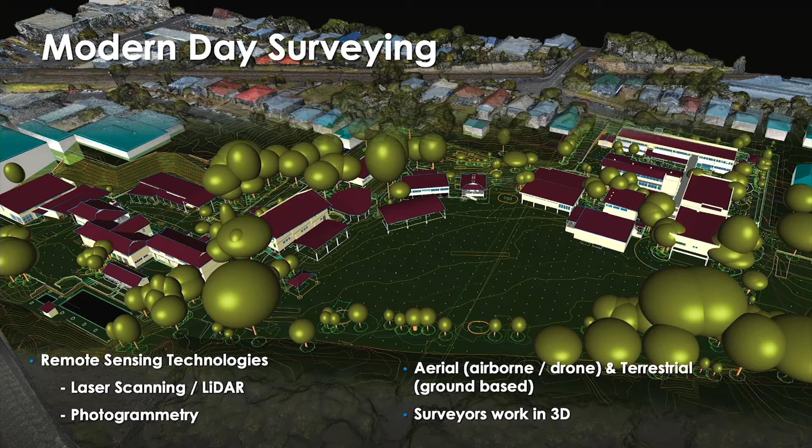And one point that I wanted to make is really all surveyors work in 3D. As a standard, our files are 3D. And we do get a lot of clients ask for 2D, thinking that they might... It's actually not any easier. It's flattening our data and sending it out.

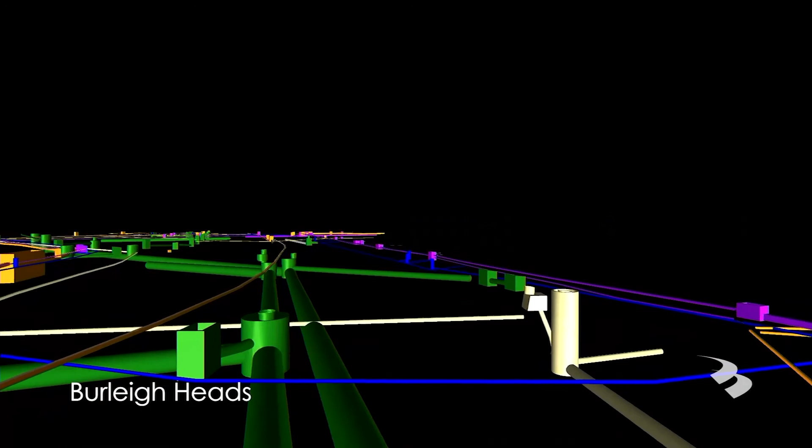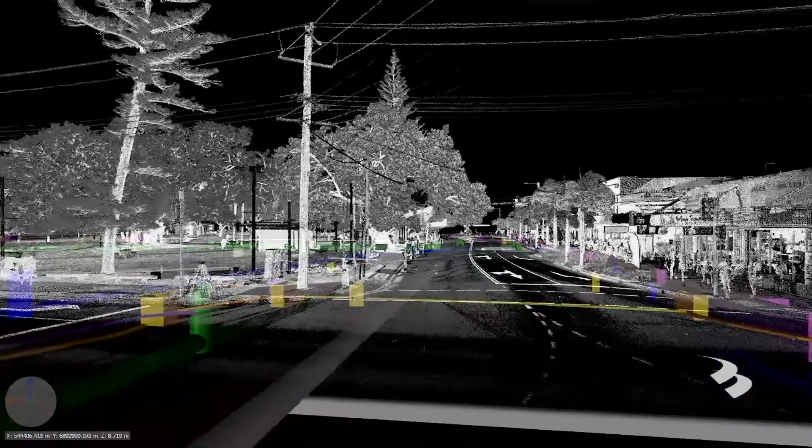So surveying applications: laser scanning, detail surveys. Essentially, we might laser scan areas because they're difficult to access, complex environments to model, things that really would require a hell of a lot of field time. So essentially, we're doing a lot less surveying in the field and more on this nowadays. I'll touch on some of the outputs that we can get from these types of surveys, but I'm pretty much just trying to show a few applications that we're doing in modern day surveying.

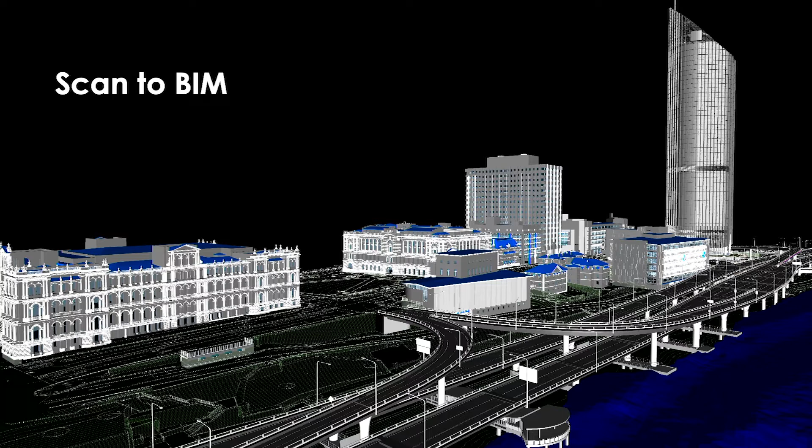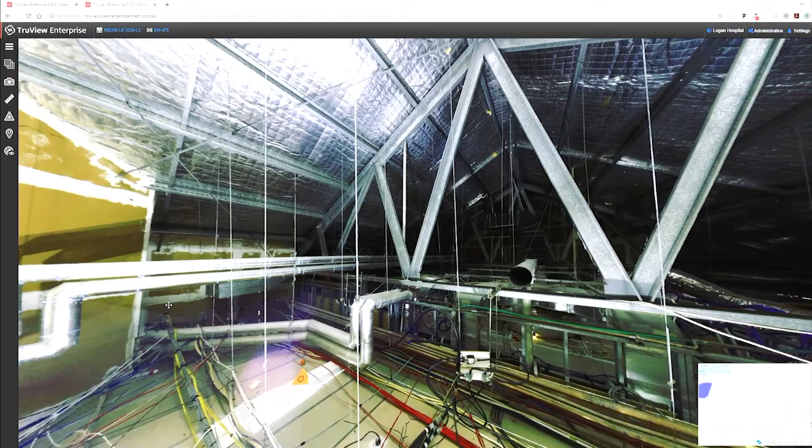Scan to BIM, many would have heard of this nowadays. It's essentially laser scanning and subsequent 3D modeling. And yes, we're Revit users, as pretty much any surveyor. I'm probably the only one here, and I'm going to be very unpopular showing Revit there. I'm just showing one of the applications we're doing is embedding things like TruView panoramic imagery inside of these files. We have this week found a workflow to get it into IFC files for Archicad. Made this video beforehand. But these are the type of deliverables that you can really maximize nowadays.

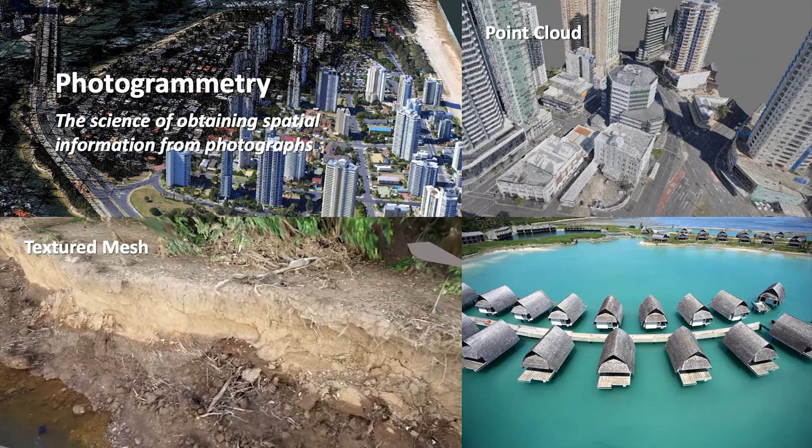So that was laser scanning. Photogrammetry can be done by your iPhone, just take a lot of photos, stitch them together, create a 3D model, or you can use high-end digital mapping cameras and things like that. It has really taken a huge step over the recent years with drones, and almost all surveyors have a drone in their toolkit to do these types of surveys as well.

So different survey information needs, things to consider when asking for a survey. We will go through a brief at the end. Cadastral boundaries are always important. If you're building close to the boundary, the secondary interests, or you're doing a lot reconfiguration, cadastral surveys are required. Sometimes they're not. You can just get away with a standard detail or contour survey. Did want to talk a little bit about the difference. A detail survey is essentially getting all of the detail surface features on site. A contour survey might just be topography, so if you are demolishing everything, you might not actually need everything done.

Measured building surveys, that's obviously the internal measurements, which nowadays we do mostly with scan to BIM. Underground service requirements. There are actually subsurface utility standards associated with that we survey to. So obviously we can go to mapping every single service underground in 3D to centimetre accuracy, but sometimes you just need an indication. It's not always required.

Accuracy requirements. Often we see on briefs by other consultants telling us the accuracy that we need to meet on a survey. And of course we can almost always meet these accuracies, but it's always about weighing up the cost associated with that. Do you really need 5mm accuracy on an open sports field that's going to be ripped up anyway? So it's just something to consider. And will an aerial survey be sufficient? You might be able to save a fair bit of cost on the early phase of the project by doing it by a different method.

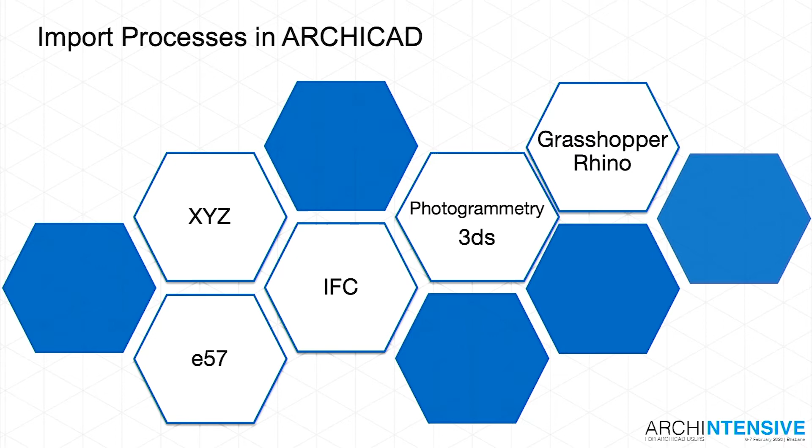So when we start with this process, you've got to think of the different ways in which you can bring information into Archicad. So we're experimenting and identifying the different methodologies that users can take to generate a site terrain. So moving away from the standard approach where users are tracing DWG drawings, you can bring in XYZ files, and I'll talk about those and the problems with those in a minute. E57 or a point cloud file format, IFC format. Photogrammetry can come into Archicad as a 3DS file, which converts into a GDL object, and then processes using Grasshopper and Rhino.

Oh, it's all right. The video hopefully will work.

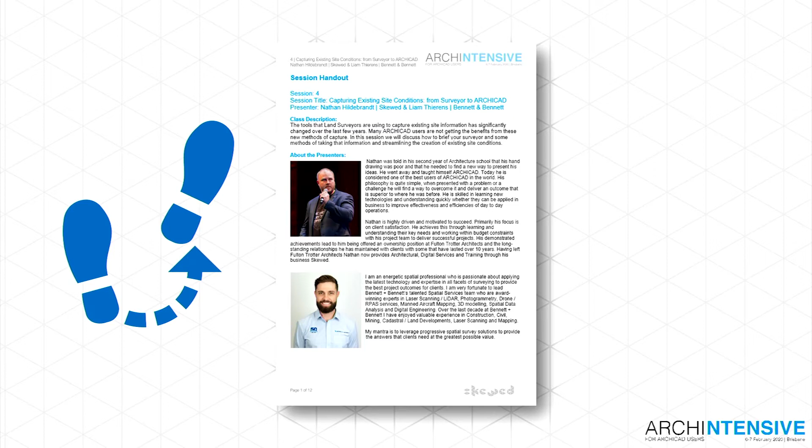So the key thing is that I'm not going to go through all the processes in 40 minutes. It's going to take a long time. So I encourage you to read the handout. There's step-by-step guides on how to import these file formats and get a terrain output, okay? So if you want to see that and the step-by-step, go into the handout and you'll be able to actually achieve it.

So what criteria? We always look at what's the outputs that we're trying to achieve. So what's the criteria that I'm wanting to achieve in a terrain? Well, first of all, how long is it going to take me to create? Because that's time and that's going to cost me money. What's the graphic output in plan? Do I end up with contours? Will contour lines be in plan? Secondly, graphic output in sections and elevations. Am I going to achieve a solid appearance rather than having a single line plane?

And the rain's coming down big time now.

The ability to actually interact with this element that's been created and modify it and change it and be able to do things to it. Attribute management. I keep banging on about attributes, but attributes also can be affected through this import process. Polygon count and the load on your software, because the last thing you want to do is load something into your file, build this terrain on a site that you're working with, and have your file perform poorly from the time you start working on it, and you're starting on a bad foot already.

But most of all, I think the most important component of all this is accuracy. Now, when a surveyor goes out on site, in the past they used to go around with a dumpy level and take points at places where they thought it was very important to achieve the level of accuracy that was being requested by the architect at the time. I think that's right, isn't it? You'd make the educated decision as a licensed surveyor to say, I need to get levels at these points. Now processes have changed, and you can do things differently with scanners and all that sort of stuff that then calculates those things. But you want to achieve the accuracy that you've actually asked for in the delivery from the surveyor.

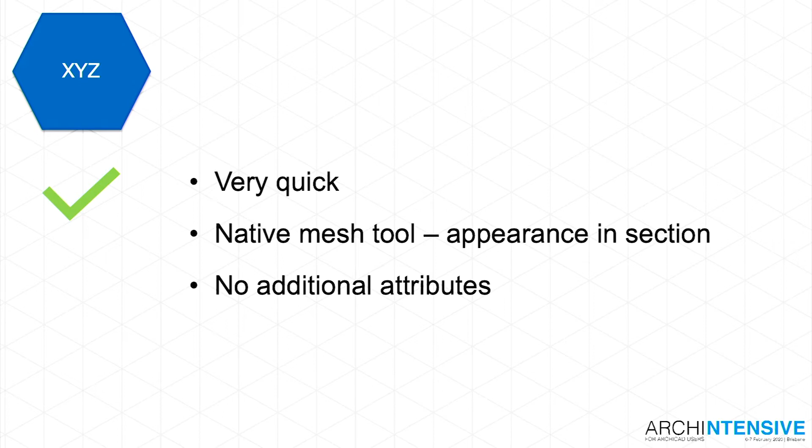So let's look at those in point. So XYZ files. Let's look at the positive of an XYZ file. It's very quick, right? And it uses the native mesh tool. So you get appearance in section, and you get no additional attributes. So it's using what's already built in Archicad. Now, the big failure in XYZ: there's no contour lines, it just generates a plain old mesh.

There's very high inaccuracy at break lines, and I tested this workflow a decade ago and told Graphisoft they should pull this whole feature out of the software because of the potential danger of this and how people will just say to a surveyor, oh, can I have an XYZ because I've got that feature in my software. It's going to work really, really well. But I'm going to show you in a live demonstration in a minute how bad it can be and how you don't want to use this at all.

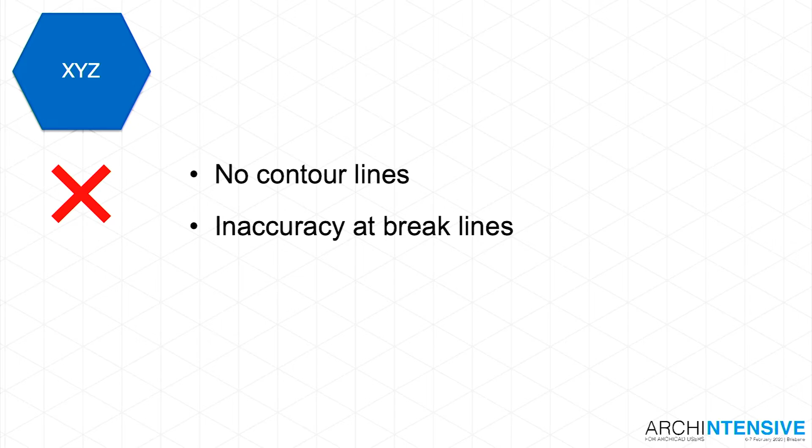So he's taken those 13 points, and when an XYZ is imported into Archicad, it just puts the points into space. It doesn't do anything more than that. It has no more smarts. It's only an XYZ in a text file. It says, I'm this height in this location. But a surveyor works in triangles.

So each point has a relationship to 2 other points as a minimum to then generate and create a true terrain. Now, people can test me all you like on this, and we talked about, okay, well, if we wanted to stick with XYZ as a methodology because we're going to use native mesh, can we just increase the density of said points to reduce the inaccuracy?

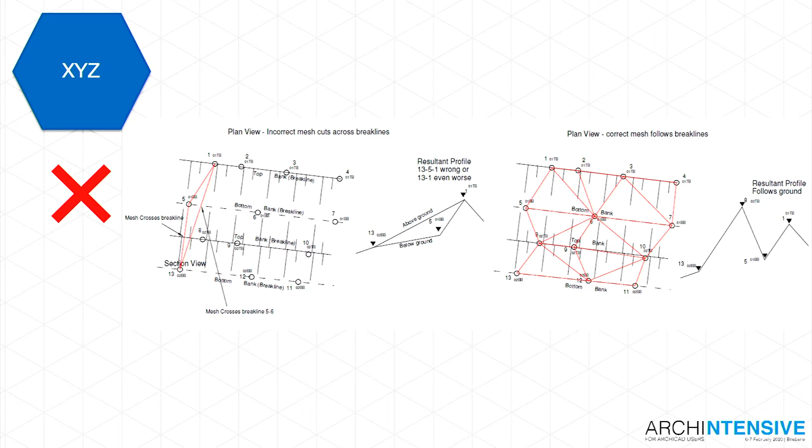Now, once again, I'll show you an output that comes directly out of a surveying piece of software where it has generated this XYZ by algorithm, because it's determined that's the right methodology to do so, in comparison to an IFC export. It's quite scary, so please do not use this methodology. So, a point cloud.

So point clouds, in my view, are really, really powerful for capturing existing conditions, because the majority of projects that I used to work on were located in remote Queensland. So if you missed a dimension, you'd have to travel for 2 to 3 hours via car to site, take the extra dimensions that you wanted, and then drive back to the office. So you've lost a whole day, potentially, of time in capturing these things.

So a surveyor, when they go out on site, can use their scanner, capture all of that information. Once again, it's a time saver for them as well, because you could at the start say, you know what, I only need this information. Now, point B, if you ask for a certain level of accuracy and the level of accuracy that you want increases, that can cause a problem with scan times. So it would have scanned at a certain speed, which takes a certain amount of time. If you said that you wanted to increase the accuracy, that could be a problem.

But what that can do is they can capture all of the information within this space. If you ask for the plan outline and the heights, but then you go, actually, I want to know exactly where that duct outlet is, they can go back into their data and pull that information out for you. So it's really powerful for that. As I said, it's a high level accuracy. Depending upon the material that you're hitting, the accuracy changes. So gloss, no gloss, and reflectivity and stuff like that.

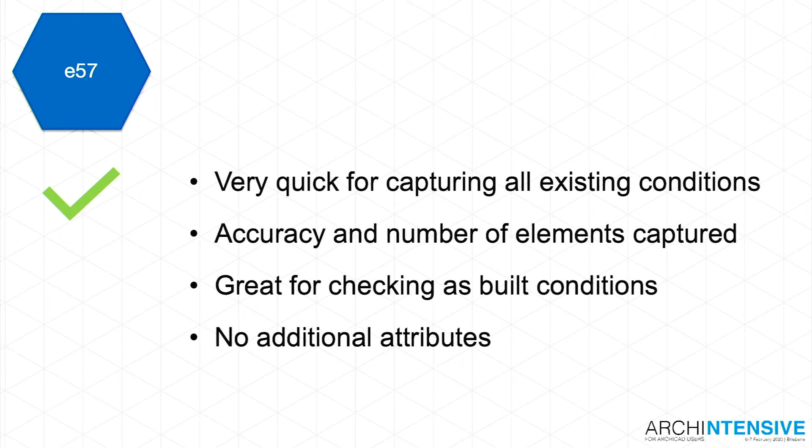And it's actually a really good process for checking as-built conditions. So as I talked about this morning, moving forward, clients are going to want more information, more accurate information about what's been built. This is possibly a process that may be utilised at the end of construction. The other positive is there's no additional attributes. Yeah, I love attributes. I should get a t-shirt on that, but anyway. But the negative is that you still need to model or trace the elements.

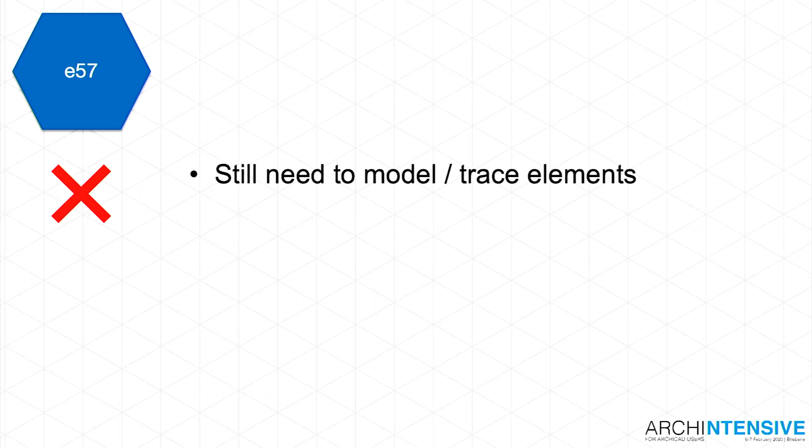Okay, so this, as a point cloud, I'll just make sure I got it. No, it's all good. So when you put a point cloud into Archicad, when you're working natively within Archicad, you can see the points in plan, in section, in elevation, and in 3D. When you publish a PDF, or when you save a view onto a layout sheet, none of that information actually carries through. So you actually have to model it. Now, there's no way in the world I'd try and model a terrain from a point cloud. Some people might be crazy, but it's not going to save you time.

The problem with point clouds, because of the number of points that it's picking up and the accuracy, the files can be extremely large. And for people that are not experienced with point clouds, when you open up a point cloud into an Archicad file the first time, it can be very overwhelming, because the level of accuracy there is what can scare you. Because you see this wall and you go, well, that wall was designed with a constant radius of a certain value.

And then when you go to model it, you'll see that there's actually inconsistencies in the depth of the plaster, because they've skim coated it to get a nice smooth finish. And the radius actually changes throughout. So you've got to get over the mindset of the accuracy that you're going to apply to it, and what's the relevance of the accuracy that you need to apply to it to actually get a built outcome.

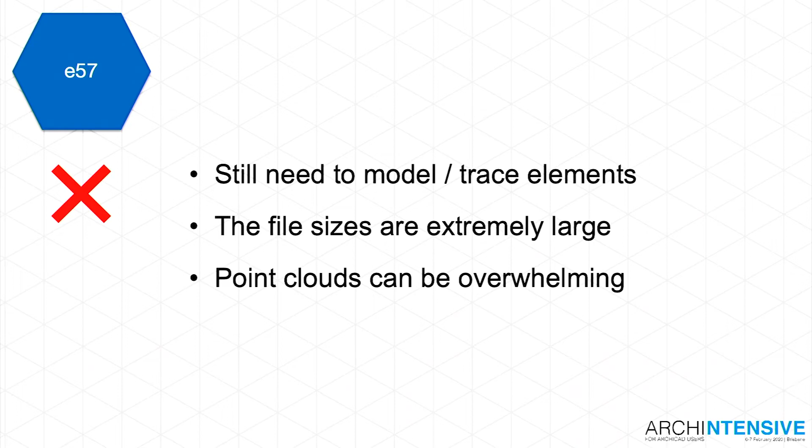IFC. So 12D is the software package that a lot of surveyors use here in Queensland. I don't know what the take-up is in the southern states. Is it pretty high still?

You're off, because I don't want any feedback.

It's still high. There we go. Yeah, it's definitely, even not just by surveyors, it's the most common civil package in the country for civil engineers as well. So their software can export an IFC TIN, which is a triangulation file that they're working with, which is the format that surveyors and civil engineers work with. That's the level of accuracy that both of those work with.

Now, the workflows: if you develop a workflow using IFC, you can not only capture the information from the surveyor, but you can also take the information from the civil engineer and their bulk earthwork levels and bring that into your file as well. So it's kind of a double banger winner.

Existing buildings in IFC format is most useful, but what you're going to find is that you'll have to have engaged your surveyor or another party to have converted the point cloud into an IFC file, but I'll also show you another software tomorrow that can automate that process or part of that process.

The other positive about IFC is the format actually holds information where all the other formats don't. Well, actually, I lie. Sorry, a point contains RGB information on top of its actual location, but IFC can hold information applied to it by a supplier, where they can actually add information explaining what that actual element is.

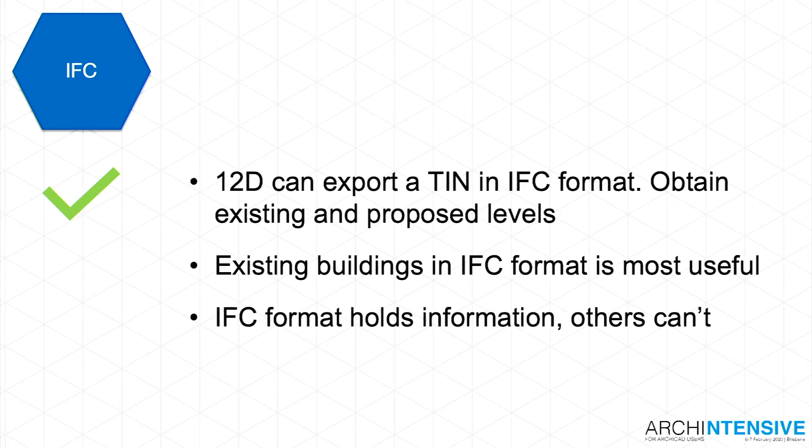So the failures of IFC: attributes can pollute your project file. So when you use IFC translators, make sure that you have a translator set up to map the information coming in so that you don't end up with stray attributes. Okay, that's the first thing.

IFC, and this is kind of across the board, IFC as a schema doesn't contain symbolic floor plan information, so it's not going to present itself graphically potentially how you want it to. And at this point in time, you can only get a plane, not a solid.

Now, there were some tests that we were able to do on Monday where we were able to get a consistent depth that followed the profile of the site, but not taking the site from its terrain level down to zero. So that's an area where it's a bit of a problem. In an ideal scenario, you could get that file with the plane all the way to the ground as an IFC solid, straight into Archicad, no other problems, no other tests. But you don't get contours, once again. So you're trying to cover all your bases.

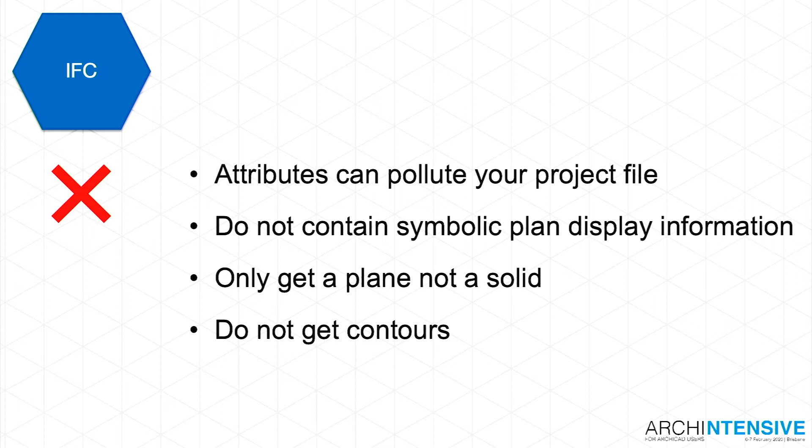Photogrammetry in 3DS, now this is exciting. I nearly killed the computer using this. It's useful for master planning and concept planning. So as Liam mentioned, they can send a plane up.

Well, you can actually pull data from the national GIS information. So they don't even have to send a plane up to capture existing terrain and buildings that surround your site. So in a master planning stage, you can ask your surveyor, can you give me this information in a 3DS format so I can import it into Archicad. So it's actually quite useful for the early phases.

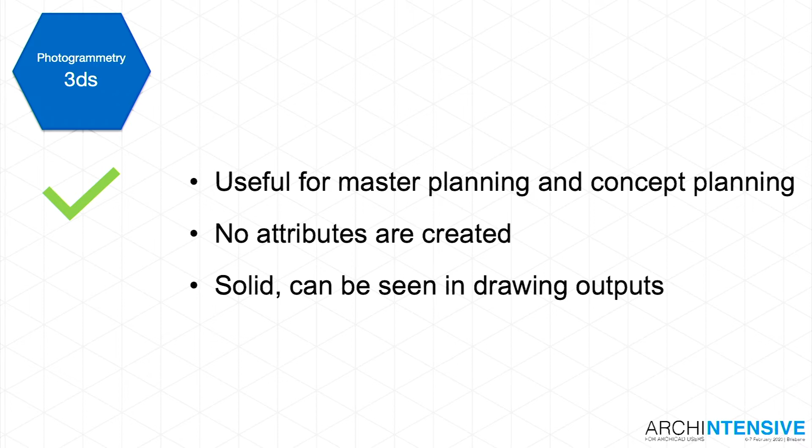No attributes get created in this process because you're bringing in a 3DS and converting it into an object. And it is solid and it can be seen in drawing outputs. So that's a big positive for it. Now the negative behind 3DS is the number of polygons it creates, and that can be a problem for a lot of users.

The textures: this format can hold textures, but sometimes it can actually lose its texture. And this has a benefit of being able to hold textures where IFC doesn't. So that's something to be mindful of. When it's converted into an object, its selection is based on a bounding box. So you get points in the corner, and you can select it with the magnet turned on, but you can't actually select the faces of the object, unlike with the other methodologies.

So let's put them all up on the board. Speed of creation: you can see here that I voted against the point cloud a little bit because you're going to have to do some work to it to get it to be meaningful for you. In terms of contours and plan, none of these actually deliver it. So the best methodology still is to bring in a DWG and place it in your file. Solid in section, we've got a mixed bag.

So we have our XYZ and our 3DS. Ability to interact with: I guess the XYZ file actually is probably the easiest one to interact with. You could argue that the IFC, when it's converted into a morph, actually has a similar capability. Attribute management: your point cloud and your XYZ don't cause you any grief. Your IFC won't cause you any grief if you set it up properly. And I think I gave that the wrong mark, but we'll move on.

All right, so 10 years of pain. I kind of want to take a pill that makes all these pains go away and solve all my surveying and existing site terrain problems. I started on the journey because 10 years ago I was given a file from this surveyor and I thought to myself, I want to try and come up with a solution that embraces this XYZ approach because it doesn't cause any issues with attributes. It's the most native way I want to work, right? But the problem is that in that XYZ format, you lose the accuracy.

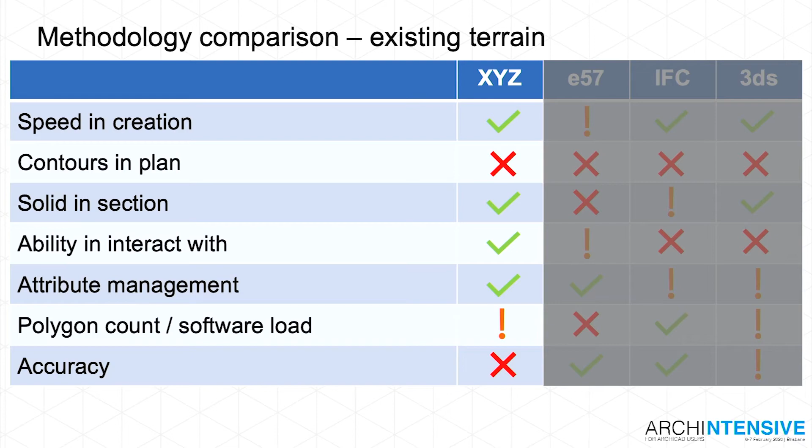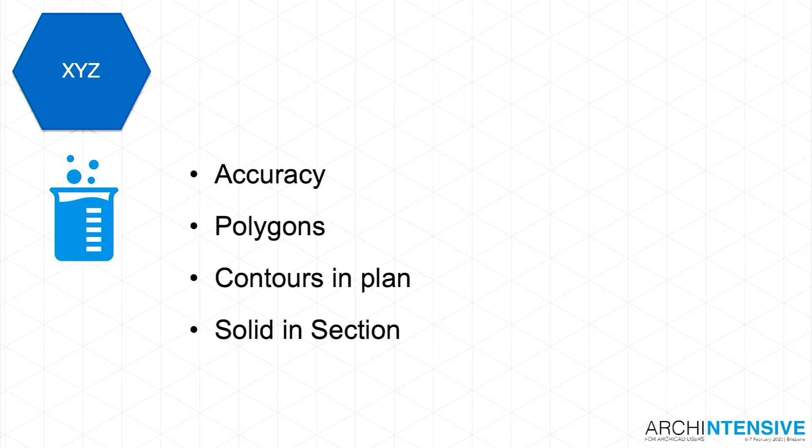So we move on to, let's experiment. And that's what the fun and joy of all of this is. It's taking lessons learned and seeing how you can do things better. So we're going to mix up a few processes. Let's look at this XYZ, right? So the accuracy is the issue. The polygons is contours in plan, solid in section. So they're the type of things that I want to achieve in this exercise.

Now, we started this experiment using this process, but the process was a 9-column text file. And what I mean by a 9-column text file was to align with the triangle file. So what we're doing is capturing each of the individual points and saying what its relationships were to 2 other points and essentially recreating a triangle file. Now, the surveyor must have gone to a lot of effort to try and create this, because all the discussions with Liam are like, we can't get this out. It can't actually be achieved.

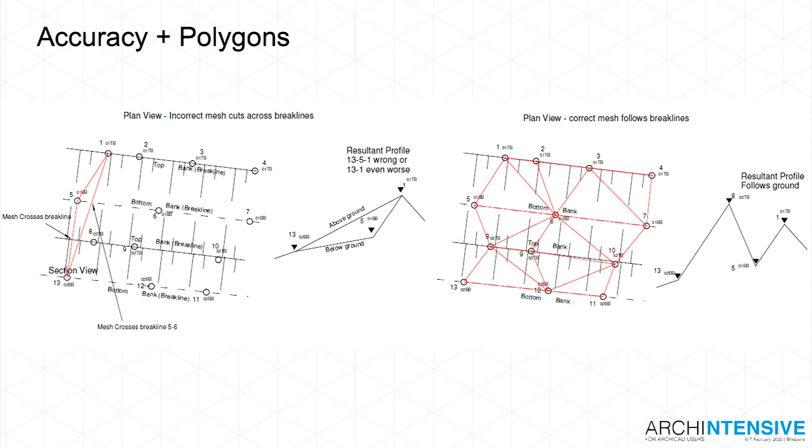Now, Jon Mirtschin from Geometry Gym, about 12 months ago I think, we came up with an experiment where we pushed that 9-column file. He took it, put it into Grasshopper and generated the nice terrain for us and demonstrated that it worked. So I've gone, all we need from our surveyor is, Liam, just give us this, and my problems are solved. But alas, we've got no chance. So triangle file, fail.

So the route that we've gone down now is IFC. The reason for that is the accuracy side of things. And I better just check because I don't want to overstep the mark. But working with Jon Mirtschin, we've worked through methodologies, and he's the brains in terms of putting Grasshopper scripts together because I couldn't do that to save my life. But we're trying to achieve accuracy and polygons here. Now, it means that we have to rely on morphs, because to achieve this complex geometry, the only way we can get it out of Grasshopper is as a morph.

And you know, we could take the approach. So I look at the way in which we could have achieved this whole scenario. So as I talked about previously, if we get this IFC, we get a plane. Now that plane, you could import the IFC into Archicad. You could then model your terrain as a solid slab or something solid. Then use that IFC, which is converted into a morph, to become a solid element operation with an upward extrusion, therefore generating your solid terrain.

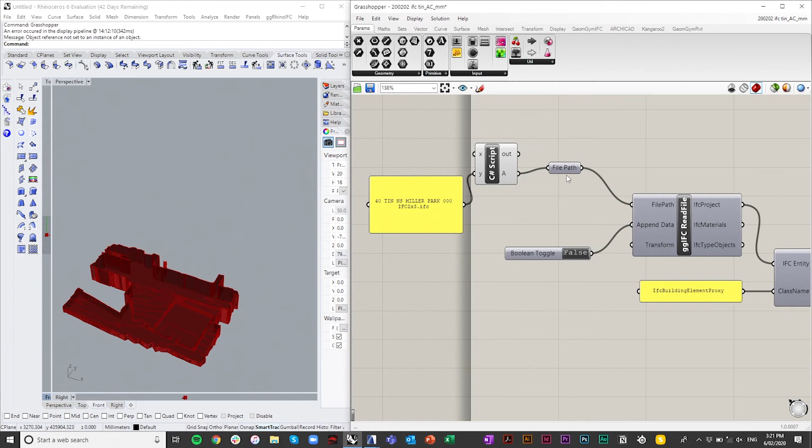You take the time. So I'm not going to go into detail about the script specifically, but at the end of the day, what we have here is an input of an IFC at the start that's been created in 12D and exported. So this is a replicable example. We come down to the end, and right now it's not connected to Archicad. So at the bottom end here, I've got a morph, which is a morph solid, which generates my terrain in 3D. And at the top here, I've got my morph curves, which essentially set out all of my contours.

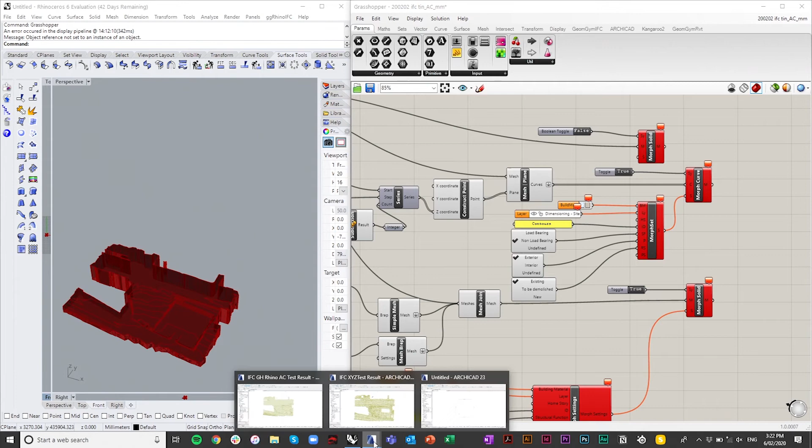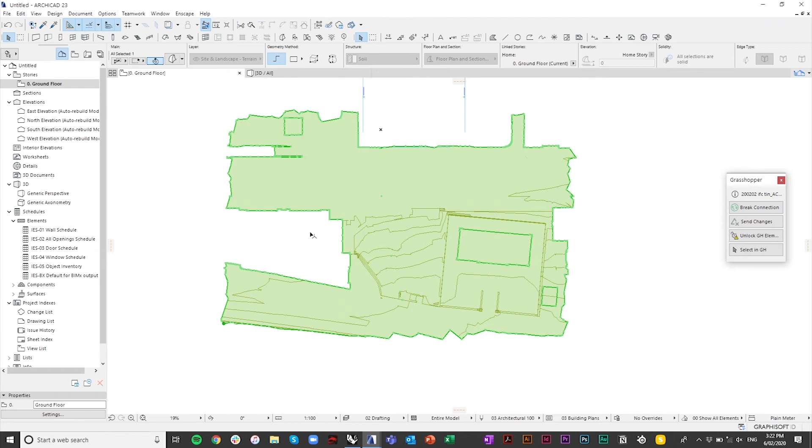Now, I'm going to open a blank file, and we're going to connect this to Grasshopper. Now, I've cheated a little bit because of the story settings. So this is an out-of-the-box international version of Archicad 23. So what we have now is our mesh, which is a morph, and we've got our morph contour lines. So in 3D, we'll explode out. That's how it is.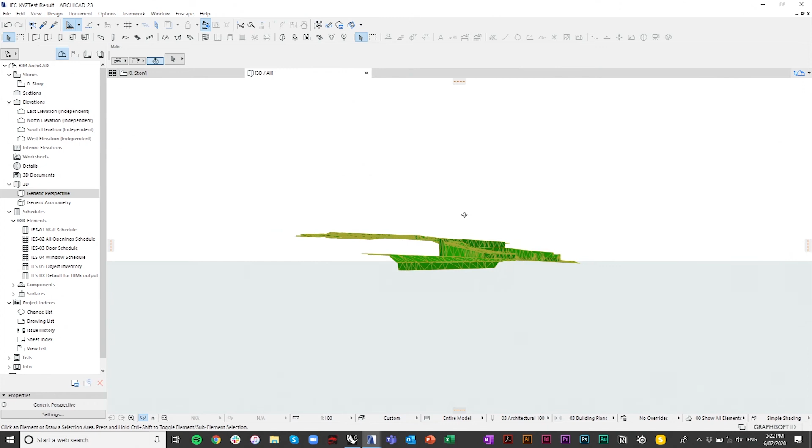Now, just to give you a bit of context, this is what an IFC looks like when we bring it straight into Archicad from the IFC file that was created. Now you see here there are some holes in here. So John cheated a little bit and wrote some script to cover in some holes that appeared in the middle. Now you can talk to your surveyor about whether or not he is willing to put a plane in where existing buildings are, because obviously not providing information in those holes means that he's saying that he hasn't measured it, so you could take that approach.

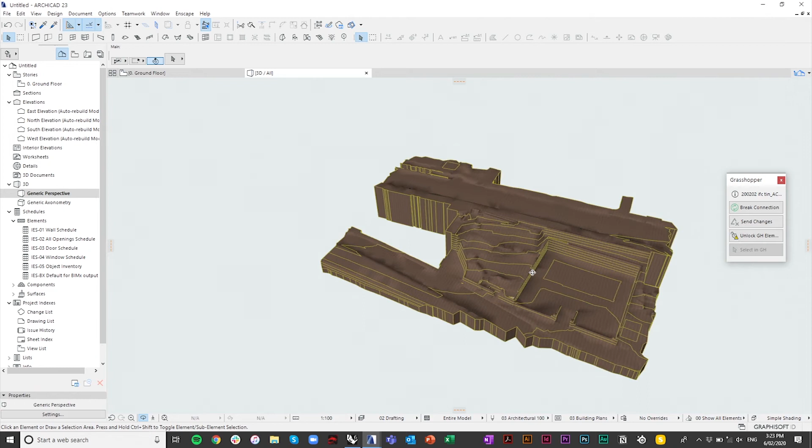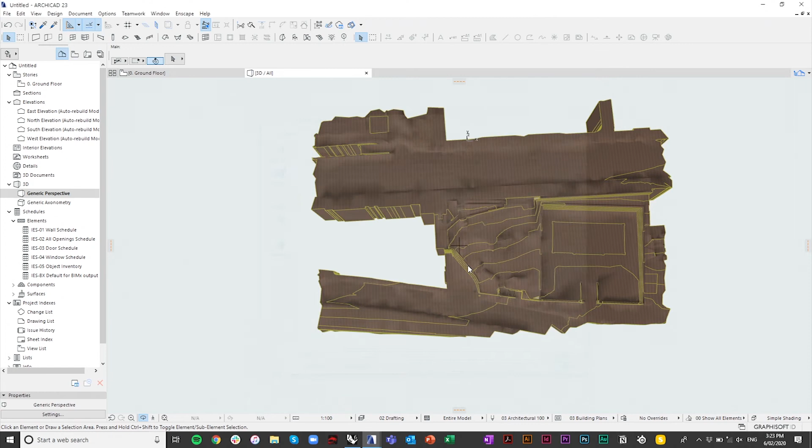But what you can see here is an output straight from Grasshopper. Now, let's see if it's going to behave itself. And I want to now do the XYZ methodology. So just remember, when you're looking at this, actually I shouldn't do this in 3D, I should do it in 2D just so it's a bit neater. But I want you to observe where the boundary of this IFC mesh is that's been placed as a morph. So I want you to observe where the edges are. That's the first thing I want you to see.

So let's go to interoperability. We're going to place a mesh. This is an XYZ, pure XYZ file.

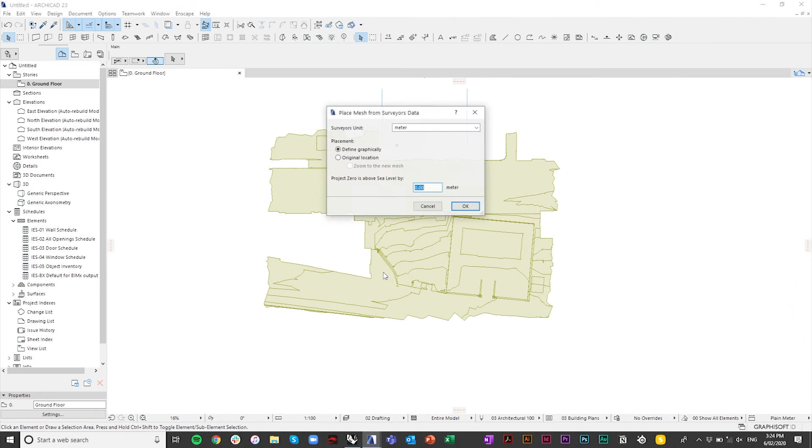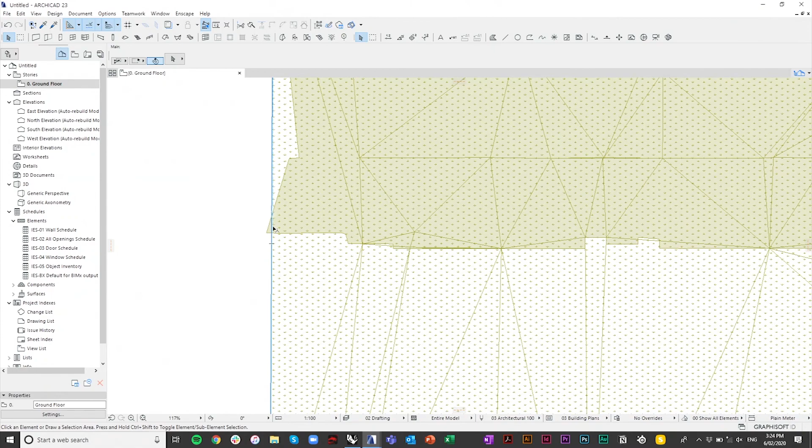Because we've received it from a surveyor, we're in meters, because they like it, and we're going to put it in its original location. All right. What's the problem, first of all? So based upon the XYZ coordinates that are part of that file, Archicad said, well, I've got points in certain locations, so I'm going to fill the gaps. All right, so it's missing bits.

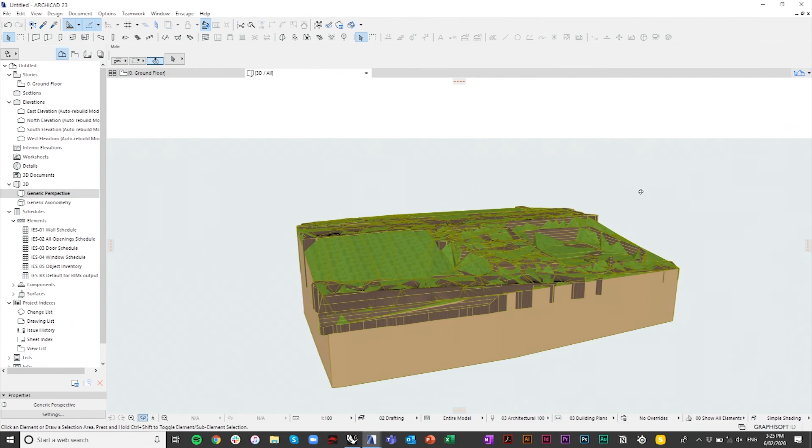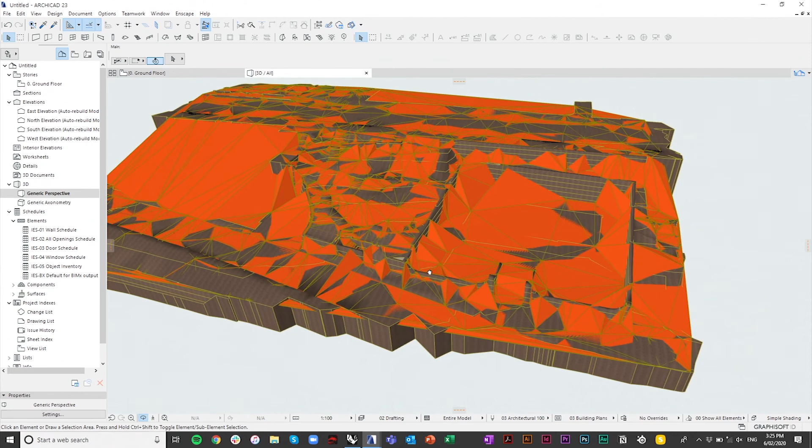But this is the more entertaining part, and this is the reason why you never use XYZ. Yep, that's all right, we're going to do that later. So what we want to do, and normally I put this over the other IFC file. Now, the XYZ, because I don't like it, I really detest it, let's make it red, and let's make it a plane. Now, because of its approximations and its estimations, look at the difference between the accurate IFC and the XYZ.

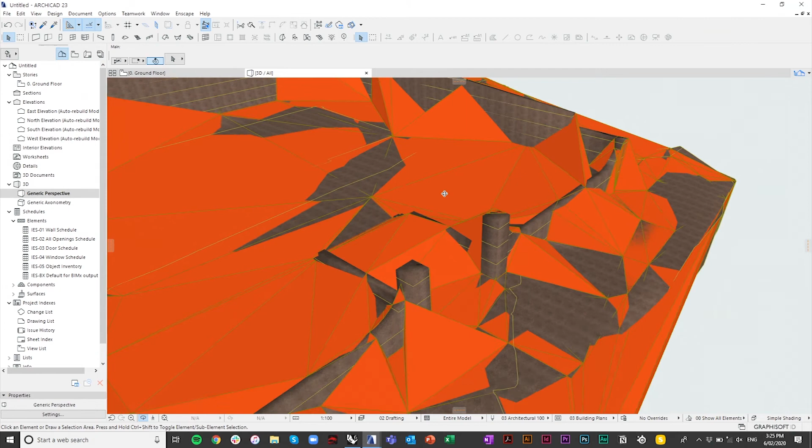Now, when I first did this, it was the pillars to the commissariat store, just down the road, across the river, accurately provided by a surveyor and essentially decimated by an XYZ process, okay? So it's something that I basically think should be thrown in the bin.

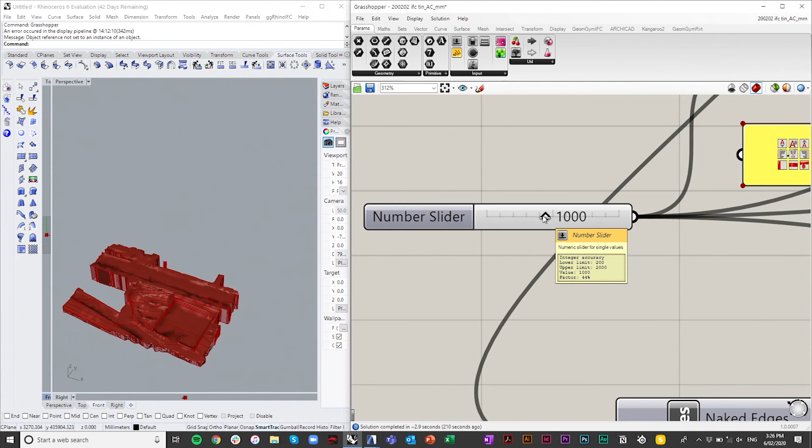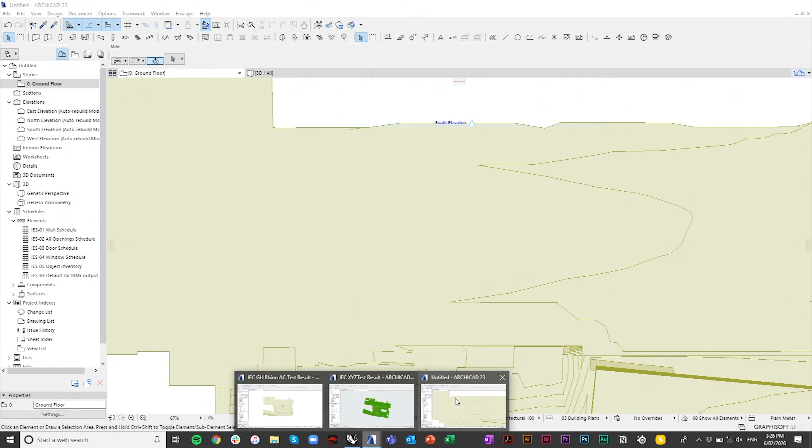Now I've deleted that. But the other benefit that we have now, and one of the things I didn't touch on with John's script, is depending upon the size of your site, I can control the contours. So if I want 500 mil, and it's better to click on this because my accuracy in clicking isn't that good, we'll go back in to this file here. And because I've live linked it, it might behave itself, but we'll just double check I didn't kill the connection. We'll see that we are going to have obviously the additional contour lines.

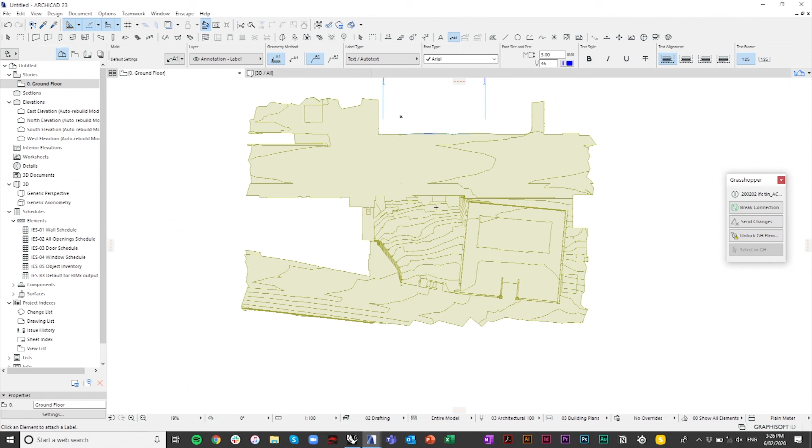Now, why is this also a benefit? So we're going to go to our labels, and I'm just going to turn off the label leader. And because it's still working, it's going to be a bit slow and cranky at me. But let's just click on this morph.

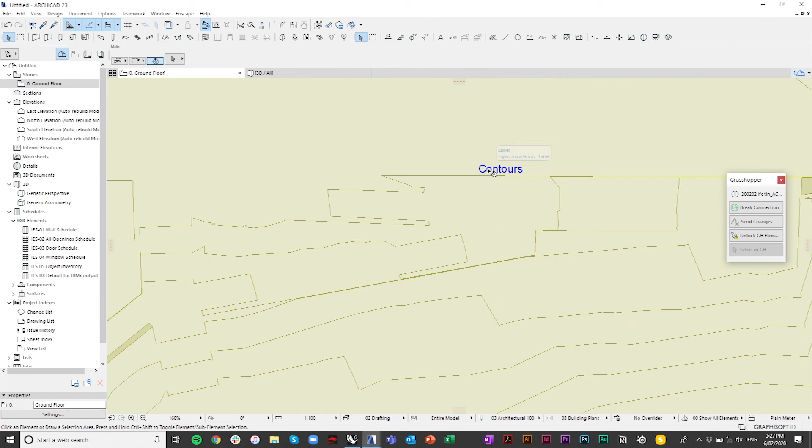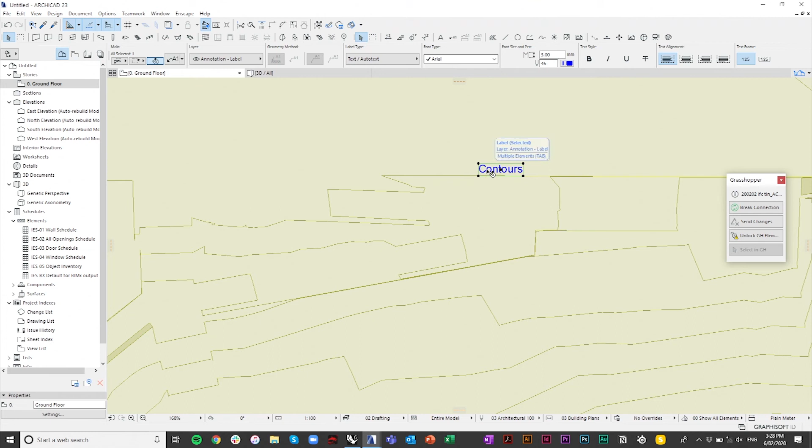And it's going to... I'll fall asleep before I can select this thing properly. Let's just... See, my computer's saying it's too late to work. Anyway, what we'll do is we'll just be cheeky here. It doesn't like having all these Archicads open. Thank you. So now what we're going to do... Oh, ha ha. All right, we're playing a game now. Live demos, that's it. Oh, live demos are my favourite. But in any case, just don't change on me again. Thank you. No. All right, one click and we'll hold and we'll wait half an hour. No.

In any case, you understand the point. At the end of the day, you can go in there and write dumb text RL, height from sea level, and associate that label to each one of your contours as you see fit. So from my perspective, yes, you still have to bring in a DWG to put some lines out there, but you could potentially push this experiment even further and get to the point where you can say to the surveyor, you know what, I only want you to send me the curbs in this IFC file. I only want you to send me the road in that file.

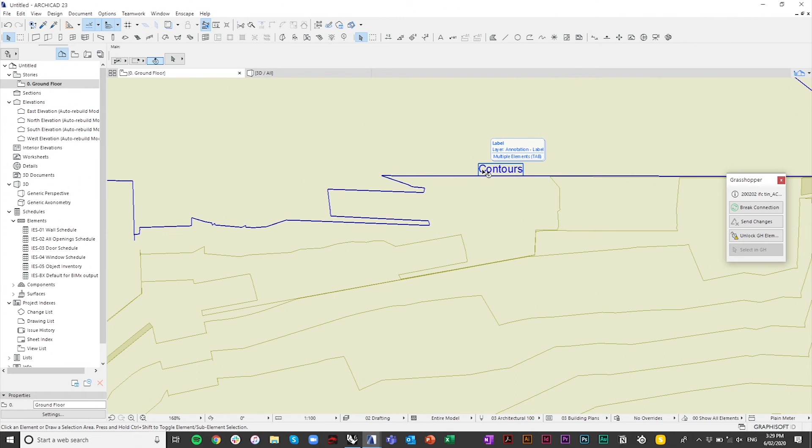Then you can separate the pavement anyway. Yeah, so you can separate everything as separate files, and then you basically duplicate this process down on the work page of your Grasshopper, and essentially bring in each individual bit, put them on separate layers, and all the lines are then created because they have their own bounding edges. So it's a pretty spectacular potential way of working. And as I said, it's highly experimental, so don't sign off saying it's the only way in the world to do it. So I'm going to hand back to Liam to close out the presentation. And you are live.

Yeah, so look, I won't be too much longer. I was more just going on alternative survey deliverables, things that you might not have dealt with before. I mentioned before that sometimes an aerial survey is actually all you might need on a job. It's very easy to get a copy and paste survey spec on a job, but often if it's early phase of a job, maybe an aerial survey would do. Whether it's a manned aircraft or a drone, they're both viable options, depending on the accuracy requirements.

Often they are less than half the cost of a ground survey. So it depends on the scale and the area, but it's something to think about. And it can contain a lot of contextual information outside the site.

Depending on the job, LiDAR or photogrammetry does make a big difference. If you are looking for the accurate ground surface, then LiDAR is always the way to go because it does actually penetrate the vegetation to get the true ground surface. With photogrammetry, we'll purely just get the top of whatever surfaces you are, but they're never as accurate as a ground survey. So it's weighing up that sort of cost versus accuracy.

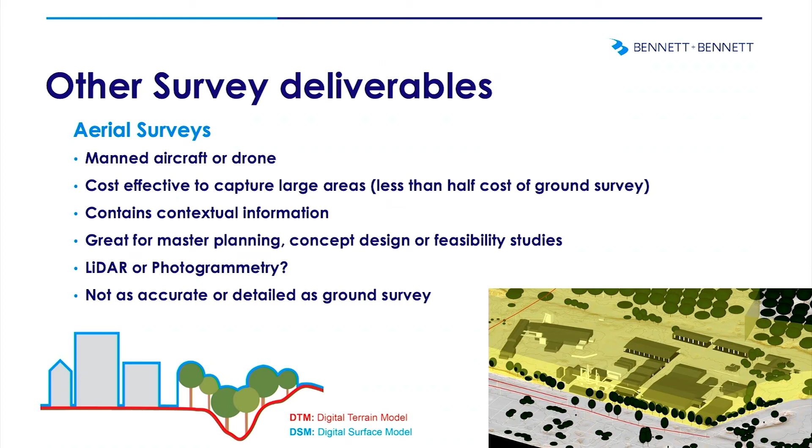And typical deliverables will be orthographic imagery, where it's super high-res imagery. Sometimes pixel sizes between about 1 and 5 centimeters. I think the one that you're looking at here is about 2 centimeter GSD, and it's all to scale. It's all horizontally. This one's about 50 mil accurate, so we can actually supply a CAD outline, so you can import this in, draw over it.

We've actually scaled this one here for South Bank. You can actually see where we are on this one, where that's all just done by aerial survey and delivered as CAD. And other survey deliverables you might have seen before, 3D services, even without using laser scanning or anything like that.

Often surveyors, when they are picking up underground services, we are getting attribute information, depth, size, materials, and all that. And we can actually create 3D objects from that. Sometimes we laser scan them and things like that. And street furniture, light poles, street lights, and all that sort of stuff. So that's the type of deliverables that are on offer as well.

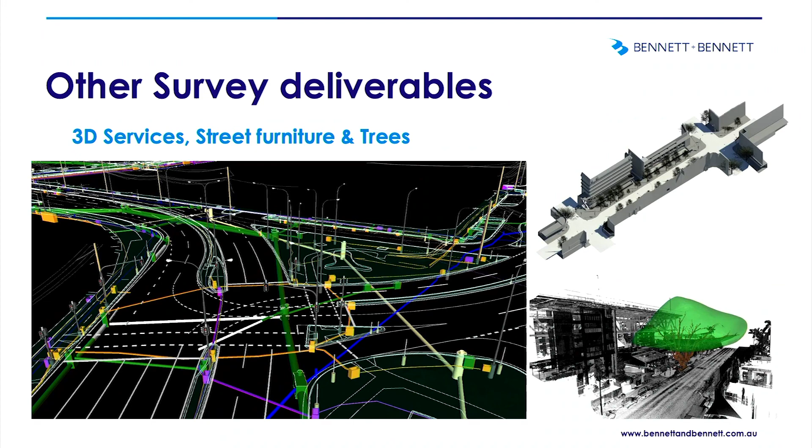Can be delivered via IFC into Archicad. And 3D trees and things as well. We've done various things for all sorts of projects like that.

So conclusion, briefing a land surveyor. Look, we could give you a run-of-the-mill survey spec. Often we do reverse brief on surveys, but key things to consider: purpose of the survey. It really helps if we've got a little bit of background on why we're doing the survey, what the end product is, because often we can provide our experience of what might be the most suitable spec.

Clear area of interest. The amount of times we get a very, very vague area of interest and you didn't get the next door building, you didn't highlight it. Bane of my existence, clear area of interest. Cadastral survey requirements, obviously we're happy to provide advice on that. Underground services, as I mentioned before, there are certain standards and specifications related to those.

Particular features or areas of interest on a job. Often, we can survey the whole site to a certain spec and then really get more detail on certain items. How accurate do you really need the survey? So as I mentioned before, we don't have to do this whole accuracy. You could be like, look, I need the finished floor level really to that millimeter level, but on the grass I only need sort of that 30 mil or something like that.